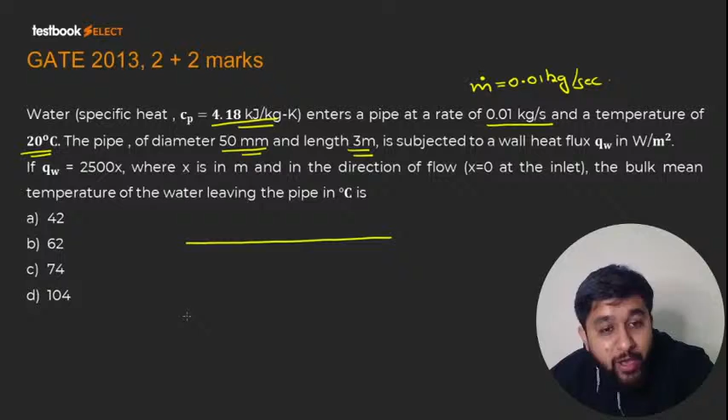और कहता है द पाइप ऑफ डायमीटर 50 mm एंड द लेंथ 3 मीटर इज सब्जेक्टेड टू वॉल हीट फ्लक्स QW इन वॉट पर मीटर स्क्वायर। सो वो कह रहा है कि आपके पास एक पाइप लेंथ है, ठीक है, सो मे बी गीजर के अंदर की पाइप है। तो गीजर में क्या होता है, गीजर में पाइप के अराउंड एक इलेक्ट्रिकल कॉइल होती है, तो इलेक्ट्रिकल कॉइल जो हीट जनरेट करती है वो पाइप के सरफेस को सप्लाई होती है, पाइप के आउटर सरफेस को सप्लाई होती है, और फिर पाइप के आउटर सरफेस से अंदर के फ्लूइड में जाती है ना। सो यू आर सप्लाइंग सम हीट फ्लक्स टू द पाइप, तो ये उसी हीट फ्लक्स की बात कर रहे हैं।

और अगर आपको ध्यान हो फ्लो थ्रू पाइप्स के केस में दो कंडीशंस होती हैं, एक होता है यूनिफॉर्म हीट फ्लक्स की और एक होता है यूनिफॉर्म टेम्परेचर की। जो अभी मेरे करंट स्टूडेंट्स हैं, सो गाइज मैंने आपको यूनिफॉर्म टेम्परेचर और यूनिफॉर्म कंडीशन के केस में नसल्स नंबर तो बताया था, पर मुझे बाद में ऐसा लगा कि यार अगर हम आधा पौना घंटा और डिस्कशन कर लेते हैं तो वो भी बेटर रहेगा। तो मैं एक शॉर्ट रिकॉर्डेड वीडियो बनाऊंगा, उसको यूट्यूब पे भी डाल दूंगा और आप लोगों के साथ भी शेयर कर दूंगा, सो आप लोग भी देख लीजिएगा।

अब वो बोलता है इस पाइप का डायामीटर कितना है, पाइप का डायामीटर है 50 mm, दैट इज 0.05 मीटर। तो मैं इसको पहले से ही 0.05 मीटर लिख लेता हूं, ताकि मेरे को बाद में कैलकुलेशन मिस्टेक ना हो। और फिर वो कहता है कि इस पाइप की जो लेंथ है वो 3 मीटर है, और हमें जो हीट फ्लक्स दिया हुआ है QW वो वॉट पर मीटर स्क्वायर में है।

अब जरा देखो वो क्या कहता है, इफ QW इज इक्वल टू 2500x, QW कितना है 2500x है। अब ये 2500x का मतलब क्या है, वो कह रहा है वेयर x इज इन मीटर एंड इन द डायरेक्शन ऑफ फ्लो, x इक्वल टू 0 एट द इनलेट, what is the bulk mean temperature of water leaving the pipe in degree Celsius। तो कौन बताएगा हाउ टू सॉल्व दिस क्वेश्चन।

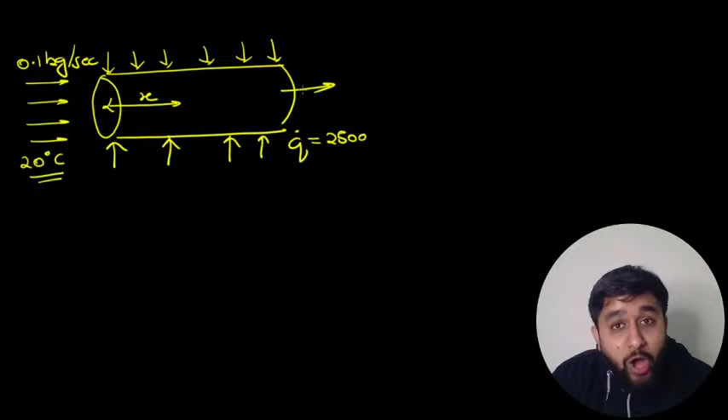What you have to find out? Exit temperature. Very good. I think Anish has already given us an answer and Dipankar is telling us the method to solve the question. Very good, very nice. So let me check whether Anish's answer is correct or not, and whether Dipankar's strategy will work here or not.

So what Dipankar is saying is: sir, what do you know? You know how much fluid is coming inside the pipe, so the pipe is a control volume, right? So how much fluid is coming inside the pipe and what is the temperature of that fluid? So basically you know how much enthalpy is coming inside the control volume, inside the pipe. And they are also telling us the heat flux.

So heat supplied to the pipe, heat supplied to the control volume. I think what Dipankar is telling us is that for steady state flow, the total energy coming inside is equal to the total enthalpy, total energy going outside. This is what he is telling us.

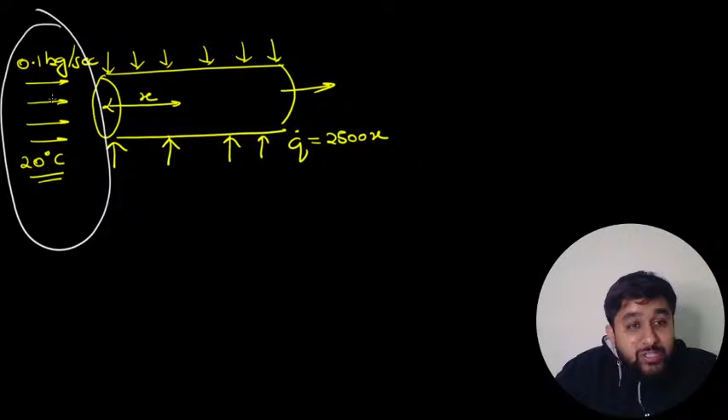So let us try one thing, let us apply this condition. So what you will say is: at inlet, the fluid will come inside with some enthalpy. So you will always write it as enthalpy rate, amount of enthalpy coming inside per unit time.

And to the pipe, we are supplying a heat transfer rate, which is given in this form, heat flux form. But simultaneously, the fluid is going outside also, so when the fluid goes outside, the enthalpy goes outside. So you will say the rate at which enthalpy goes outside. This is the steady state flow energy equation: the rate at which enthalpy goes outside minus the rate at which enthalpy comes inside is equal to the rate of heat supply to the pipe.

Now what is this, enthalpy going out, enthalpy coming inside? So I think for steady state flow, we can also write this as m dot Cp times (T naught minus Ti). So what will happen? This will be equal to Q dot.

Now what is this? This is the temperature of outgoing fluid, and this is the temperature of incoming fluid. So what you will say is: the temperature of outgoing fluid is equal to the temperature of incoming fluid plus Q dot by m dot Cp. Yes or no?

Please do let me know if this is correct or not. Tell me quickly if this is correct or not, if this method is correct or not.

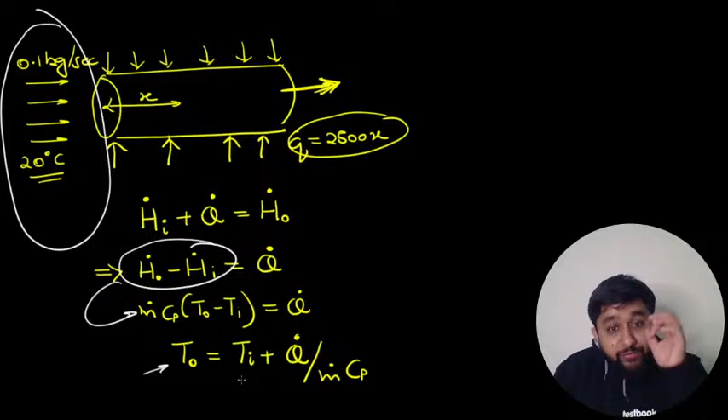Now the question is, we have to find out T naught, and for finding out T naught we should know Ti. Do we know Ti, the inlet temperature? Yes, we know it. Do we know the value of m dot? Yes, it is 0.01 kg per second. Do we know the specific heat at constant pressure? Yes, 4.18 kilojoule per kg Kelvin.

So in this, if somehow you are able to find out capital Q dot, you will be able to find out T naught also. So only one thing is missing, which we have to find out, that is capital Q dot. Once we know capital Q dot, we will also know the temperature of water at outlet.

Now let's do one thing, let us find out capital Q dot. So who will tell me how to find out capital Q dot? Anyone, please be fast. How to find out capital Q dot?

Integrate करके. Very good, very nice. Now guys check, what do you mean by heat flux? Multiply by surface area. Very good.

बहुत बढ़िया, ठीक है, good. Now guys check, what do you mean by heat flux? Heat flux means heat transfer rate per unit area, heat supplied to the pipe surface per unit area.

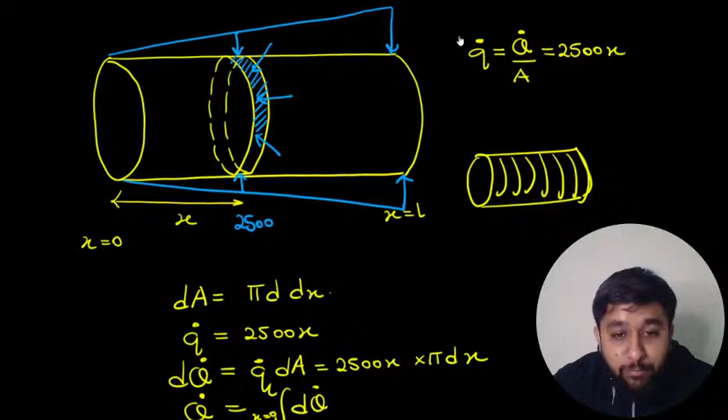Yesterday I came across a video - NPTEL has launched a new course, Fluid Mechanics for Astrophysics. आप लोग देखते होंगे Big Bang Theory, और उसमें एक गाय है called Rajesh Koothrappali, है ना? वो astrophysicist था। So fluid mechanics is used for study of सोलर सिस्टम, study of universe. बहुत इंटरेस्टिंग कोर्स है, अगर आप थर्ड ईयर में हैं तो sufficient time है, आप check कर सकते हैं। वेल सर, first hypersonic wind tunnel has been developed by DRDO in Hyderabad, first Indian, after USA and Russia. ये तो बहुत बढ़िया चीज है, nice है ना? और भी कुछ आ रहा था, hyperloop की testing भी हुई है, India में भी testing हुई है, वो एलन मस्क, अपना पड़ोसी बोल रहा हूं, उसकी भी testing हुई है।

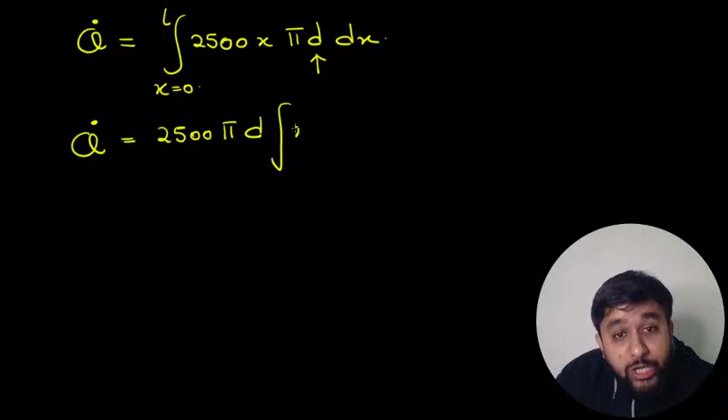Thank you Anish, thank you for your kind words. So let us integrate it. 2500x pi d dx from x equal to 0 to L. Now 2500 is a constant, pi is a constant, diameter of the pipe is a constant, it will also come inside. Integral of x dx, where x varies from 0 to L.

In our case the diameter of the pipe is 0.05 meters, and the length of the pipe is 3 meters. Integral of x dx, that will be x square by 2. So you will have q dot equal to 2500 pi into 0.05, and this decimal and these zeros will cancel out, into x square by 2, where x varies from 0 to 3.

So this becomes 25 into 5, that is 125. 125 pi into 3 square, that is 9. 9 by 2 minus 0 by 2.

I think this is what you are getting. Please check if my answer is correct or not, or if I have made any mistake.

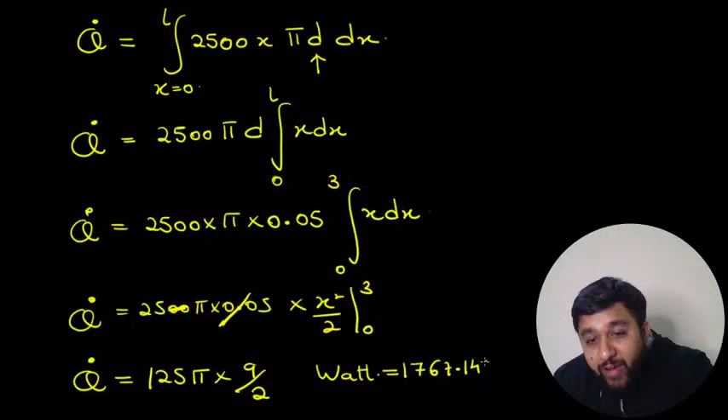1767.146 watts. So Anish, Reddy, please check, me and Dipankar both are getting the same answer.

Right now France is developing a new nuclear power plant with the help of Indian scientists. This is a very big achievement for us. People from BARC are helping out.

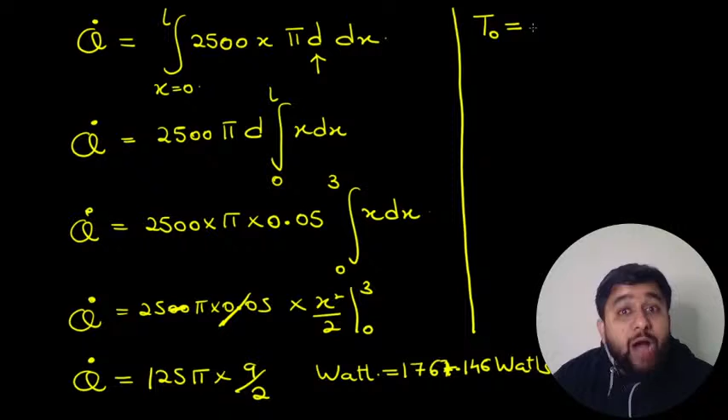Now guys, check where we want to use this heat transfer rate. We want to use this heat transfer rate to predict the outlet temperature of water. So inlet temperature of water plus Q dot upon M dot Cp.

So what will happen: inlet temperature of water is 20 degrees Celsius. Heat transfer rate is 1767.146 divided by mass flow rate, which is 0.01, and Cp is 4180.

So when you solve this: 1767.146 divided by 0.01 and divided by 4180, plus 20. So the answer will be 62.276 degrees Celsius.

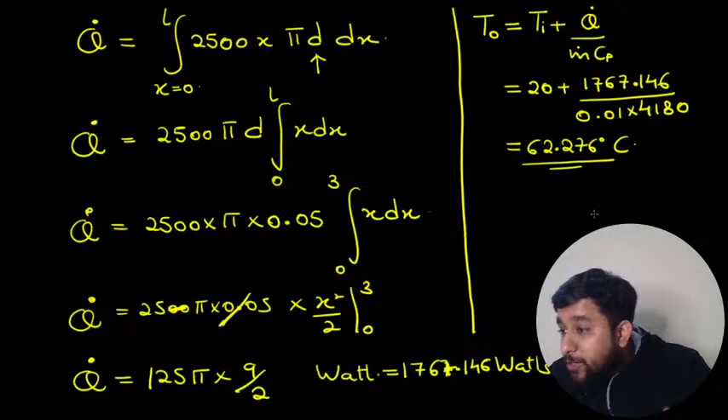0.01, beta. 0.01, I made a mistake here, I wrote it wrong here. It was 0.01 kg per second. Mass flow rate was 0.01 kg per second.

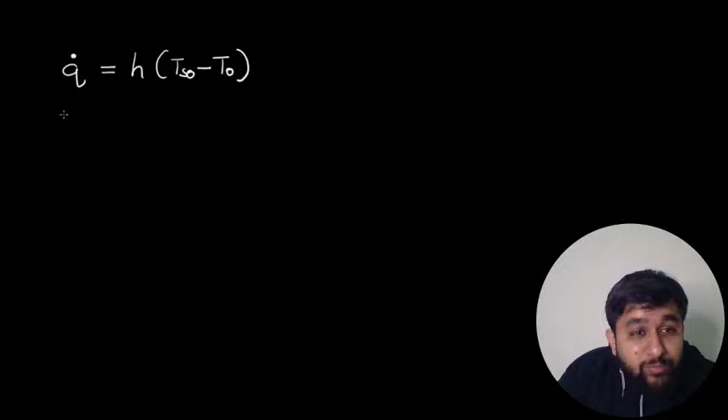Now we are talking of the outlet point, so surface temperature of pipe at outlet and fluid temperature of pipe at outlet. From this equation you can write: surface temperature of pipe at outlet equals fluid temperature at outlet plus Q dot by h. I hope I am doing this correctly.

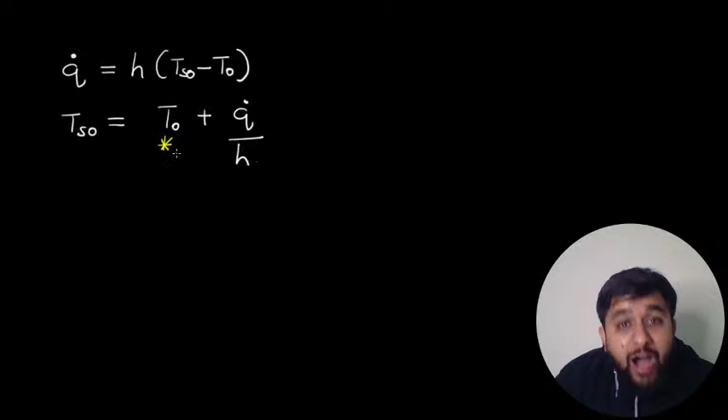This means, in this equation, if I get the value of outlet temperature of fluid, the value of heat flux, and the value of coefficient of convection, I will be able to find out the surface temperature of the pipe also. Am I correct or not? Please do let me know.

And actually Q dot is given to us. Everywhere the heat flux is constant, same - that heat flux is 5000 watt per meter square. What is the coefficient of convection? 1000 watt per meter square Kelvin.

So to find out the surface temperature at outlet, we only need the fluid temperature at outlet, and we will add a term to it and get our answer. I hope I am saying this correctly. Deepankar is saying yes, I hope the rest of you also confirm this.

So Anish, what do you think? Am I correct, or have I made any mistake? Okay, very good, very good.

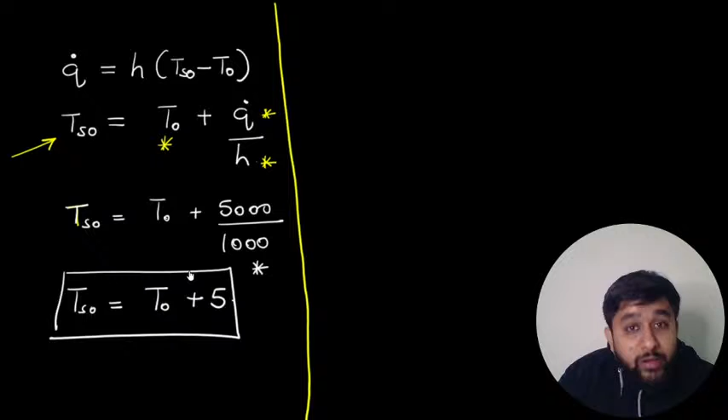So first, let us try some method to find out the outlet temperature of fluid. Now let's have a look at the data given to us. The data says the fluid comes inside with a mass flow rate of 0.01 kg per second, and enters with a temperature of 20 degrees Celsius.

So for water, the specific heat at constant pressure is 4.18 kilojoule per kg Kelvin. I think this is indicative of how much enthalpy comes inside per unit time, and it also gives us the heat supply rate to the pipe.

The heat supply rate is constant, 5000 watt per meter square everywhere. If we multiply this heat flux by the area of the pipe, we will get the total heat transfer rate. Now enthalpy is coming inside, heat is coming inside, and from here the enthalpy is going outside.

The rate at which enthalpy comes inside plus the rate of heat supply is equal to the rate of enthalpy going outside, by the steady state flow energy equation. So H dot O minus H dot I is equal to Q dot. So Q dot is equal to M dot Cp times T naught minus Ti, or T naught is equal to Ti plus Q dot by M dot Cp.

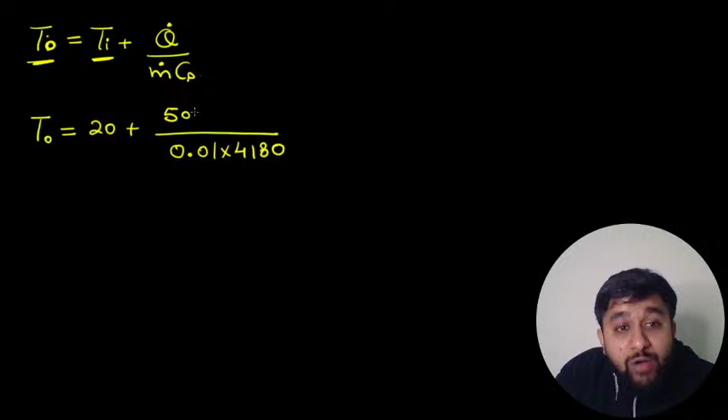How do we find the total heat transfer rate? The heat flux is uniform, 5000 watt per meter square. What will be the surface area of the pipe to which we are supplying this heat flux? I think it's pi d L, so pi into d, which is 0.05, into L, which is 3 meters. Let me confirm these values - yes, 0.05 meters is the diameter and 3 meters is the length.

So let us solve this. Please get an answer. Very good, I think this decimal and this decimal will cancel out, and this 0 and 0 will also cancel out. So you will have 500 into 50, that is 25,000 into pi into 3 divided by 418.

Did something go wrong? 5000 pi d L, 5000 pi d L into 4180... So I am getting 20 plus 56.368, that is 76.368. So this is the outlet temperature of the fluid.

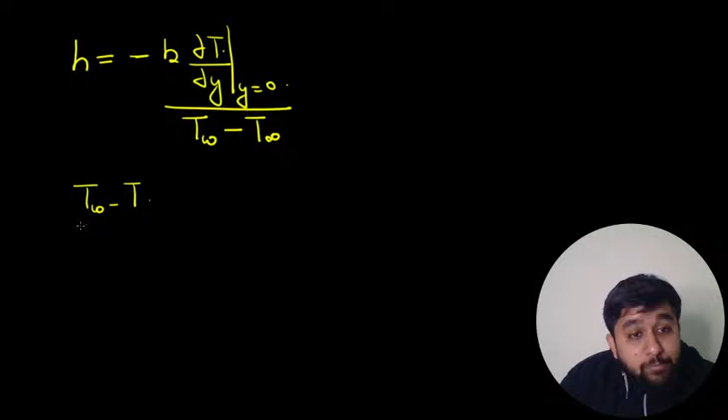Now it is given to us that wall temperature minus temperature at a point, upon wall temperature minus fluid temperature, is equal to how much? That is equal to A plus By by L, plus Cy by L whole square. Now let us take a derivative of this.

I will do del T by del Y. When I do del T by del Y, the denominator is a constant, because whatever may be the Y value - Y means the distance of a point from the surface - whatever may be the Y value, wall temperature means surface temperature, which is a constant, and T infinite means fluid temperature. So the numerator: the derivative of TW will become 0.

And here you will have minus del T by del Y. I hope I am doing it correctly. Minus del T by del Y. Now, if you have taken the derivative on the left hand side, then you will also take the derivative on the right hand side. So A is a constant, its derivative will be 0.

Y, power of Y is 1, so derivative will become 1, so this will be B by L. Power of Y is 2, y square, so derivative will become 2cy, but in the denominator there is an L square also. Now guys, please note, to find out the value of h, I need to substitute y equal to 0 in this derivative.

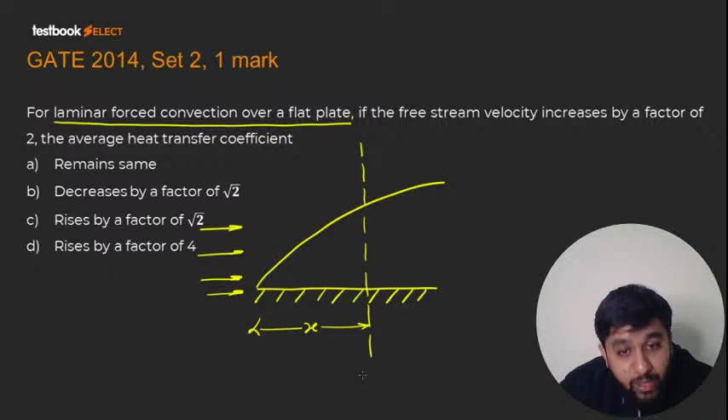For laminar boundary layer, if I take a cross section at a distance x, the local Nusselt's number at this cross section is given as 0.332 into the local Reynolds number raised to power 1 by 2 into Prandtl number raised to power 1 by 3.

At this point, the Nusselt's number that comes out is given like this. This is the local Nusselt number. And correspondingly, you can also write the local coefficient of convection.

So for the same point, the local coefficient of convection will be 0.332 into K by X into local Reynolds number raised to power 1 by 2, Prandtl number raised to power 1 by 3.

Now, what is the difference? Nusselt's number multiplied by K divided by characteristic length gives the local coefficient of convection. Why am I calling these local Nusselt number and local coefficient of convection? Because these are quantities for this particular point. But I want to write down the average quantity.

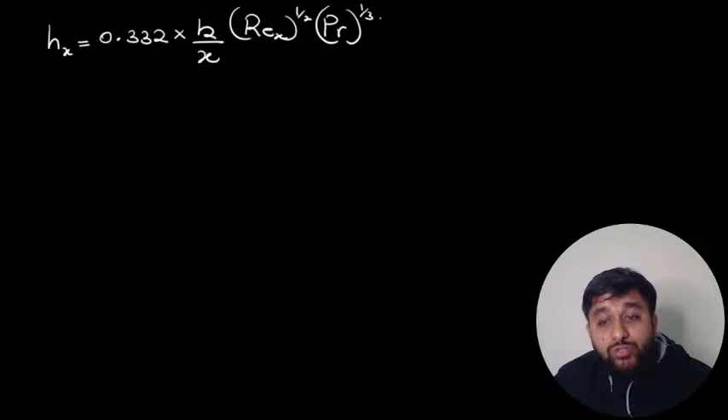Whenever I want to calculate heat transfer rate for the entire plate, I want the average quantity. What is the average quantity? The average H bar. That average quantity is 0.664 into K by L into Reynolds number at the trailing edge under root into Prandtl number cube root. I think this is the correct formula, right?

And similarly, if you write down the average Nusselt number for the complete plate, it will be 0.664 Reynolds number L under root, Prandtl number raised to power 1 by 3.

Now, apart from this, you should know the Nusselt's number for flow through pipes. Constant temperature condition, that is 3.66. Uniform heat flux condition, that is 4.36. All these values and even this formula are written for laminar boundary layer.

Then you should remember, not the entire formula, only this: for most cases of natural convection, the Nusselt's number is written as a constant into Rayleigh's number raised to power 1 by n. Rayleigh's number is Grashof number into Prandtl number. If you have laminar flow, n value is equal to 4, and if you have turbulent flow, n value is equal to 3. These things, if you can remember, that would be good.

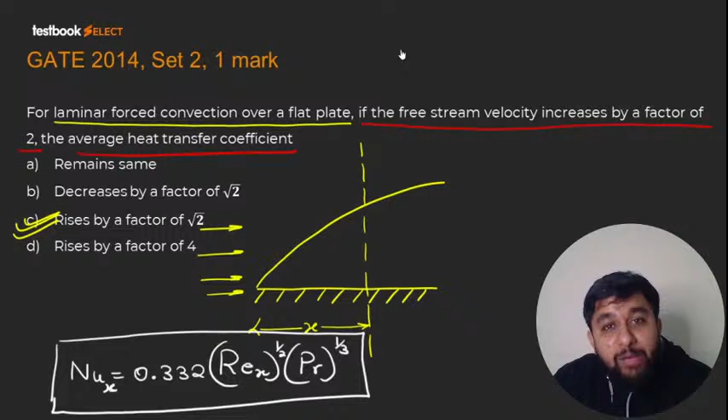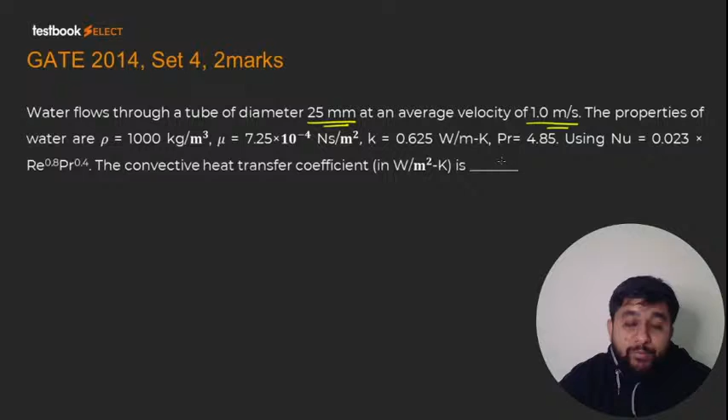Now guys check this: Water flows through a tube of diameter 25 mm at an average velocity of 1 meter per second. So there is a tube, and through the tube water flows with a mean flow velocity of 1 meter per second, and the diameter of the tube is 0.025 meter.

Now they are saying the properties of water are 1000 kg per meter cube density, dynamic viscosity is this much, thermal conductivity is this much, and Prandtl number is also given, so no need to find out Prandtl number. And they are saying Nusselt's number is this.

Whenever these powers come, this power comes from turbulent flow. This is the power for turbulent flow. If the Reynolds number power is 0.8 and Prandtl number power is 0.4, generally this is turbulent flow. So turbulent flow is going on over here. And I think you can also check using the Reynolds number value itself to confirm it.

But they are asking for the convective heat transfer coefficient. I hope you remember there are 2 methodologies to find out convective heat transfer coefficient. Either you know the temperature profile, then you can use the definition: the heat convection between the surface and fluid, H(Ts - T infinity), is nothing but the heat conduction through the layer of fluid adjacent to the solid surface. So you can use this definition, but we also know finding the temperature profile is very difficult. So generally we do experiments and find out the dimensionless number, that is Nusselt's number. Once you know the Nusselt's number, you can predict the value of H. So this is your formula for H.

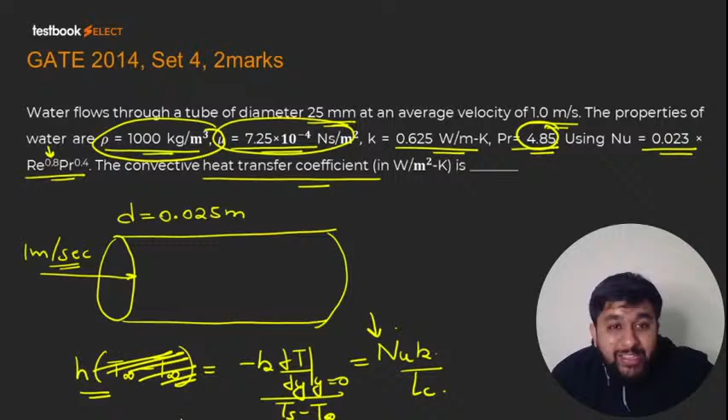So let me get the Reynolds number. Reynolds number is written as rho*u*d by mu when we are talking of flow through pipes or tubes. Let us take the values: density 1000 kg per meter cube, dynamic viscosity 7.25 into 10 raised to power minus 4, which will come in the denominator. And the flow velocity is 1 meter per second and diameter is 25 mm, that is 0.025 meters.

So let us check 1000 into 0.025 divided by 7.25, and 10 raised to power 4 will go up. So this will become 3.4485 into 10 raised to power 4. So this is your Reynolds number.

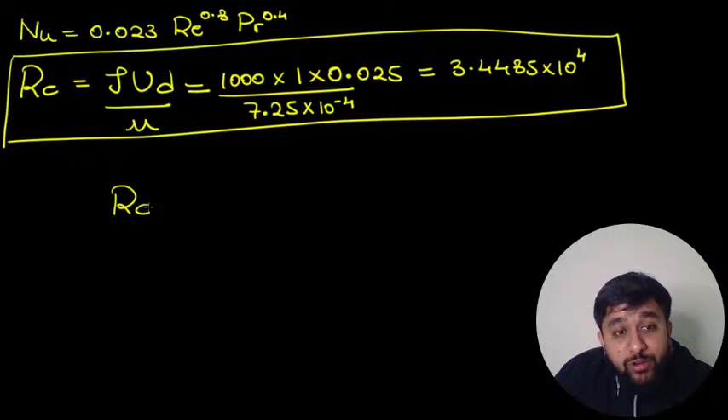Now guys, please note, if the flow is turbulent, then we use this formula. Is the flow turbulent? If Reynolds number is greater than 5.5 lakh, the flow is turbulent. I tell many times, when Reynolds number is less than 2 lakh, the flow is laminar, and when Reynolds number is more than 5.5 lakh, the flow is turbulent.

Here it looks like laminar flow. I think this is laminar flow. Is that so? No, sir.

These are the values for flow over flat plates, not for internal flows, not for flow through pipes. For flow through pipes, the critical Reynolds number is 2300 and 4000. You need to keep this in mind - these values are for flow over flat plates, and these other values are for flow through pipes. Now definitely this value is like 34,000, much greater than 4,000, so this is a turbulent flow. So that formula is given for turbulent flow.

So you know guys, have a look at Dipankar's answer. Dipankar is saying, sir, laminar flow can also be achieved in this case.

Actually, the experiments done by Reynolds were based on a certain degree of roughness and certain vibration in the system. If you eliminate all the vibration in the system, and if you make the surface very smooth, then you can achieve laminar flow at very high Reynolds numbers in this case also. So till now, people have been able to achieve laminar flow up to a Reynolds number of 1 lakh - this is an experimentally achieved value. Earlier the record was 50,000, now it has become 1 lakh.

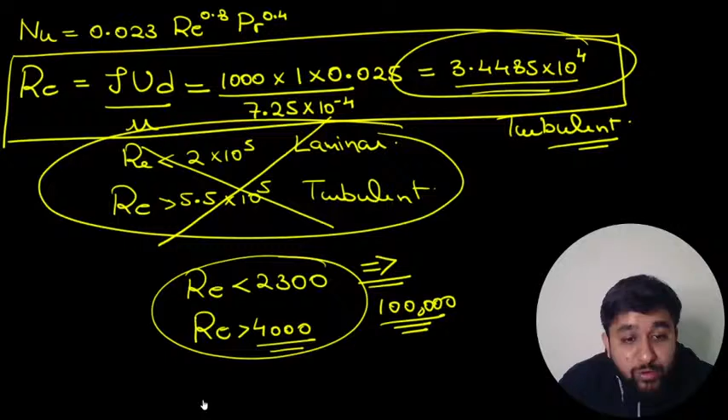Let's move ahead. Now we were trying to find out Nusselt's number. When you talk of Nusselt's number, let me take one more slide. Nusselt's number is 0.023 into Reynolds number raised to power.

So how much is the Reynolds number? Reynolds number is 34,485, raised to power 0.8. And how much is the Prandtl number? Prandtl number is 4.85, correctly given for water, raised to power 0.4.

So once you solve this, you will get your answer. And I think Anish is getting the correct answer - absolutely correct answer is coming. Let me also solve it once and check.

34485, so exponential - this thing will become 4266.81 into 0.023 into 0.4 natural log of 4.85, 0.4 natural log of 4.85 and exponential. So this is 1.88. So 1.88 into 4266.81 into 0.023. So here I am getting a Nusselt's number of 184.55.

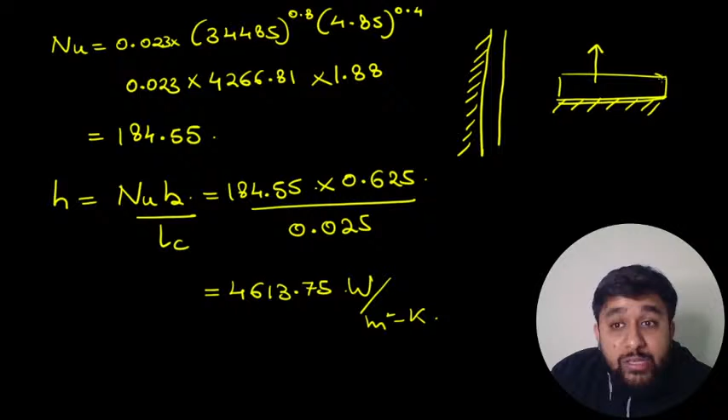अब इस पे विस्कस फोर्स लगाने वाला कौन है? कोई भी नहीं है विस्कस फोर्स लगाने वाला. मगर ये वो पॉइंट है जहां से फ्लूइड ने मूव करना स्टार्ट किया था. तो इसकी इनिशियल वेलोसिटी कितनी है? इसकी इनिशियल वेलोसिटी 0 है. तो ये डिफरेंस आता है.

सो यहां भी फ्लो वेलोसिटी 0 है नो स्लिप कंडीशन के कारण, बिकॉज ऑफ विस्कस फोर्स, और यहां पे फ्लो वेलोसिटी 0 है बिकॉज दिस इज द पॉइंट फ्रॉम वेयर द फ्लूइड विल स्टार्ट मूविंग. आई होप आई एम करेक्ट. सही बोल रहा हूं मैं शायद, ठीक है ना?

Is that correct? Please do let me know. I hope आपका यही doubt है. बाकी in real life you cannot have a fluid without vertical surfaces also. ये भी चीज है, तो यहाँ पे इनका भी boundary layer formation होगा, मगर अगर ignore कर दो तो ये चीज आती है. चलो फिर.

So I think Anish's answer, my answer, Dipankar's answer, we are all giving the same answer. So let's move ahead to the next question. What is the answer of this question? इस question का answer बताओ फटाफट. Please do let me know what is the answer of this question.

Option D. So Dipankar, Anish are saying option D. क्या कहना है Reddy? If Reddy is watching the video, it will not form at all.

So guys, first of all, please have a look. For flow of viscous fluid over a flat plate, if the fluid temperature is same as the plate temperature, the thermal boundary layer is thinner than velocity boundary layer, thicker than velocity boundary layer, or of the same thickness as velocity boundary layer. I think ये thinner कब होती है?

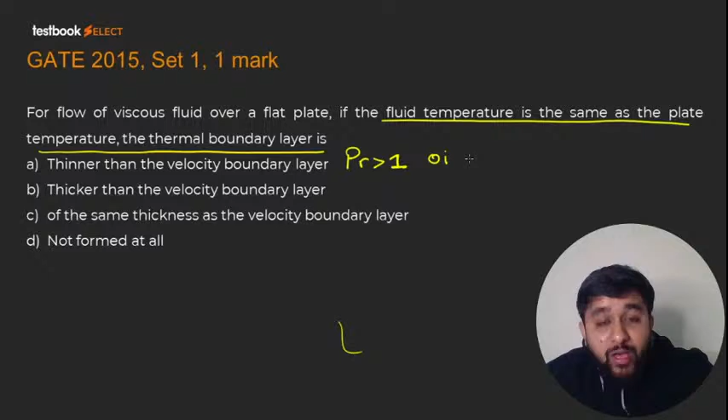जब Prandtl number greater than 1 होता है. I think when Prandtl number is greater than 1, thermal boundary layer is thinner than velocity boundary layer, which happens in case of oils. When Prandtl number is much less than 1, that is liquid metals, thermal boundary layer is greater than velocity boundary layer. And when Prandtl number is equal to 1, which happens for a lot of gases, this is the situation.

But bhaiya, thermal boundary layer means temperature as a function of Y, which happens because of heat exchange. Here the temperature values are same, so there will be no heat exchange, there will be no temperature profile. So here thermal boundary will not be formed. Very good, very nice, बिल्कुल सही है, ठीक है ना?

But sir, but is 0 less than any positive number? Is 0 less than any positive number? दीपांकर बेटा दोबारा बोलना समझ नहीं आया. मतलब शायद आप बोल रहे हो कि Prandtl नंबर नेगेटिव हो.

Is 0 less than any positive number 2? Okay, now let's move to the next question.

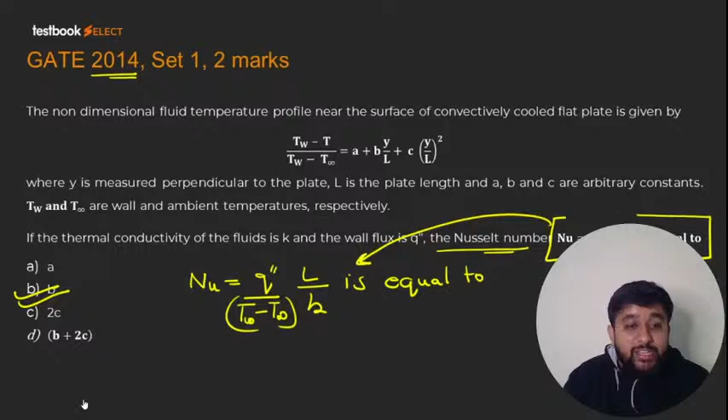This term came up in another question too. When we were solving these questions, we were using a term called mean temperature of the fluid, bulk mean temperature of the fluid.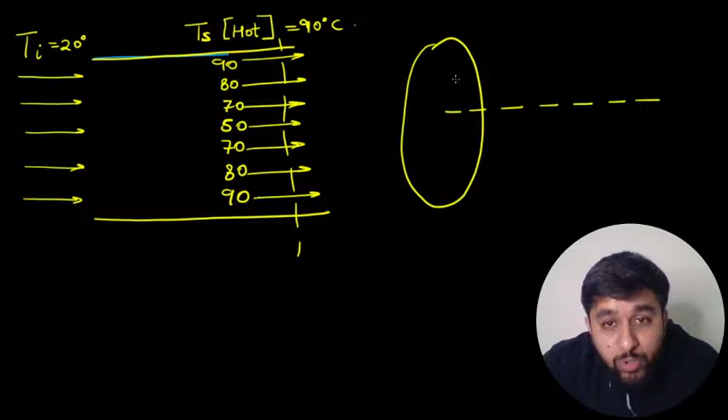So let us suppose this is the cross section of the pipe, and being axis symmetric flow - axis symmetry means there is a symmetry about the center line - I can define every term as a function of radius: velocity as a function of radius, temperature as a function of radius. Say for example, this is a circular strip, and the circular strip has an area of 2 pi r dr. How much is the area of this circular strip? 2 pi r dr.

And the velocity with which the water crosses the strip is small u. I hope you remember small u will also be a function of r. It will be minimum at the periphery due to no slip condition, and maximum at the center line. Now what will you say?

You will say that the mass crossing the strip - how will you write the mass crossing the strip? Velocity into area becomes the discharge, and discharge into density is the mass. So this is the mass crossing the strip per unit time. And if we multiply mass by specific heat and the temperature, we will get enthalpy crossing the strip per unit time. Obviously temperature is also a function of radius.

Now this is the enthalpy crossing one strip. So when you add the enthalpy crossing all the strips, you will get the total enthalpy crossing a section. First tell me, is this clear or not? First tell me.

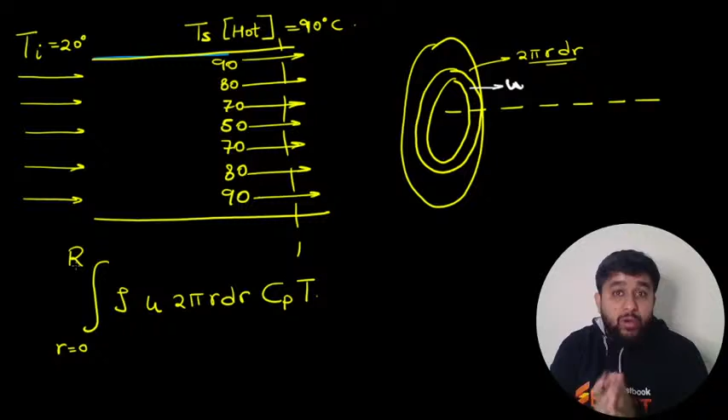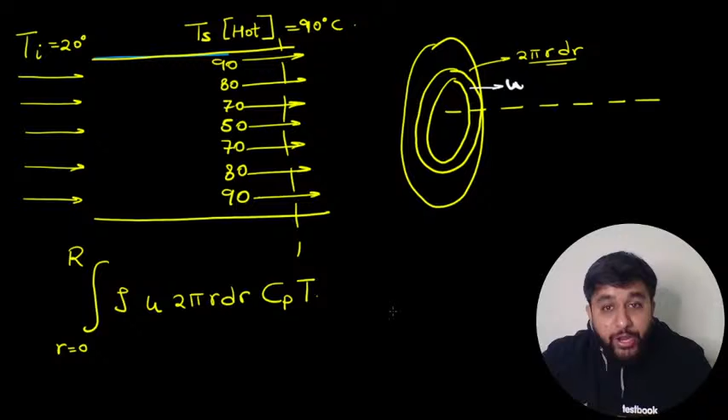Fluid crossing a section means thermal energy or enthalpy crossing a section, but this fluid has a non-uniform temperature. So we use the symmetry about the center line - everything can be written in terms of r, the distance from the center line. On all points at the same r, velocity is the same and temperature is the same, so this temperature is 80 degrees Celsius.

For this particular strip, we wrote down the mass flow rate. That mass has some temperature, and I wrote down the enthalpy - this is the enthalpy that crosses the section per unit time.

Guys, please tell me, is it clear or not clear? Is there a doubt over here or is it clear? Please do let me know.

Now when you have a non-uniform temperature, a non-uniform wall shear stress, you define an average shear stress. When you have a non-uniform coefficient of convection, you define an average coefficient of convection. Similarly, when you have non-uniform temperature, you define an average temperature.

That average temperature represents the enthalpy crossing the section. So enthalpy crossing the section is equal to mass flow rate through the section into specific heat of the fluid into mean temperature of the fluid. This mean temperature is called the bulk mean temperature - a single average value of temperature that represents the enthalpy crossing a section.

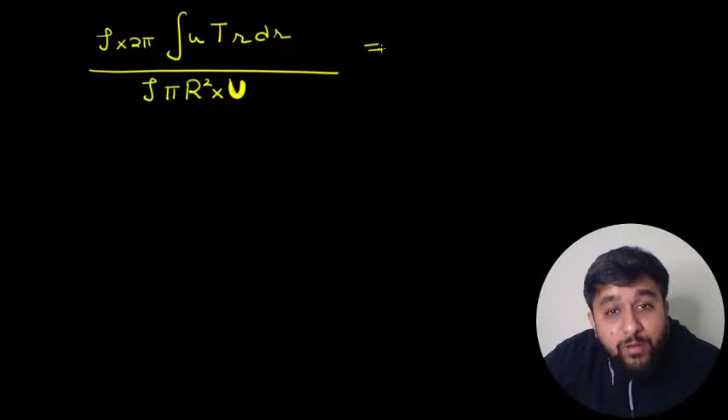Now rho and rho will cancel out, pi and pi will cancel out, and you will have mean temperature is equal to 2 times integral of U T R dR by capital R square U. I think this is what you are getting. Please do let me know if this is correct or not.

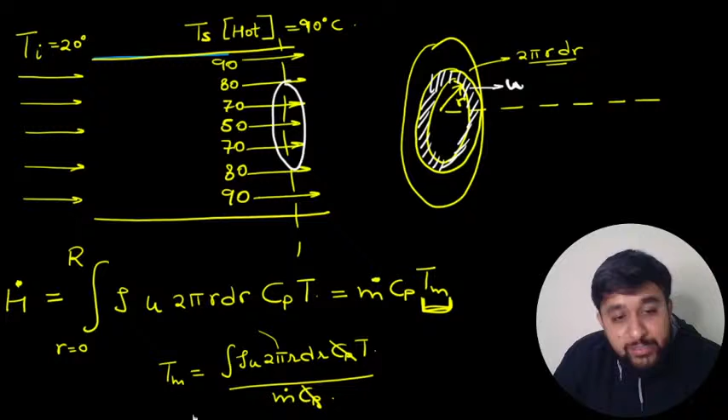Okay, now let's read the question first. It says for flow through a pipe of radius r, the velocity and the temperature distribution are as follows. So it has given you velocity as a function of r and x.

So x means along the pipe length, and a particular cross section, while r means distance from the center line. At this point, the velocity is constant, meaning everywhere the velocity is the same. But temperature is not constant - temperature is a function of r.

They are saying the bulk mean temperature is given like this. I think it's the same formula we derived: 2 by mean flow velocity, capital R square, integral of u t r dr. So they are asking, with the mean flow velocity um, what is the value of mean temperature?

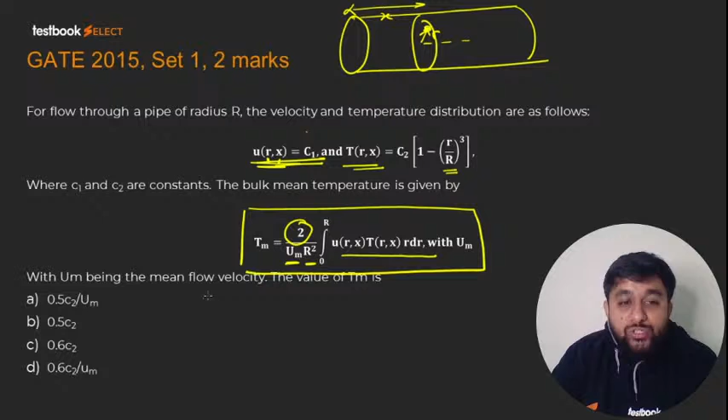Now, first of all, can anyone tell me what is the mean flow velocity in this question? What is the value of um in this question? Can anyone tell me the value of um here? Anyone, please be fast. Anish, Dipankar, what will be the value of mean flow velocity?

In this question, the mean flow velocity will of course be C1. Why? Because everywhere the velocity is constant. So when everywhere the velocity is constant, it is uniform, it is itself the mean flow velocity. So um is nothing but C1. And in fact, this will also come outside only because this is a constant.

So what will you say? You will say Tm is equal to 2u by um capital R square, and this will cancel out only, so you will have integral of T R dr. So what will be our answer? Our answer will be Tm is equal to 2 by capital R square integral of T R dr.

And what is the formula of capital T? Formula of capital T is C2, 1 minus R square by capital R square, R dr. Let me check the formula if this is correct or not. R cube - sorry, there is a cube in the question. Yes, there is a cube.

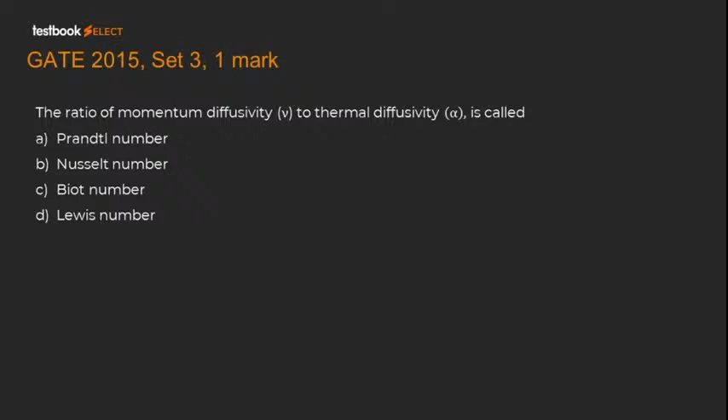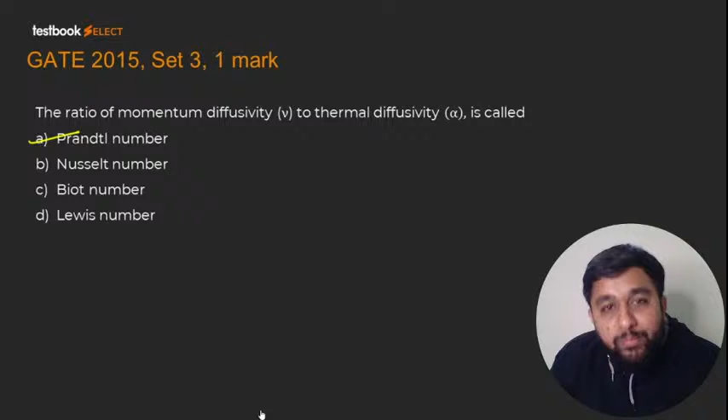Okay, I think this question is very simple, it's a direct question. The ratio of momentum diffusivity to thermal diffusivity - everyone knows it's Prandtl number. Nusselt number you know, Biot number you know, check what Lewis number is. Once Lewis number was asked in a mismatched way, once Weber number was asked mismatched, and once Schmidt number was also asked, but this was quite long back. So Lewis number is not part of your syllabus, but still for knowledge you can check it.

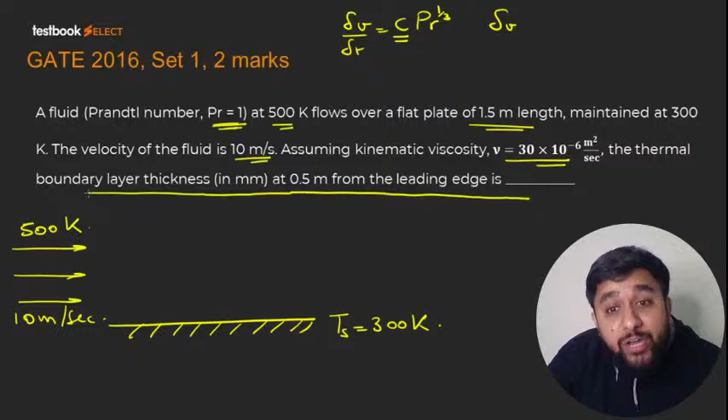They are saying that when the fluid flows over a flat plate, we know there will be formation of a velocity boundary layer and a thermal boundary layer. But since Prandtl number is equal to 1 and we majorly treat the constant to be 1, delta V and delta T will be the same, so the velocity boundary layer and thermal boundary layer will coincide.

Now they are asking, at a distance x of 0.5 meters, what will be the thickness of the velocity boundary layer? For flow over a flat plate, if the boundary layer is laminar at a section, we can use the Blasius solution, which says the thickness of the velocity boundary layer is 5x by root of Rex, provided the flow at that section is laminar. Here since Prandtl number is equal to 1, delta T is equal to delta.

First, let us find the Reynolds number at section x. We write rho u naught x by mu. The kinematic viscosity is given as 30 into 10 raised to power minus 6, since u naught by x, mu by rho is the kinematic viscosity. Velocity is 10 meters per second and x is 0.5 meters. The decimals will cancel out, giving us 1 by 6, and we will have 1 by 6 into 10 raised to power 6, which becomes 1.667 into 10 raised to power 5. So this is the Reynolds number.

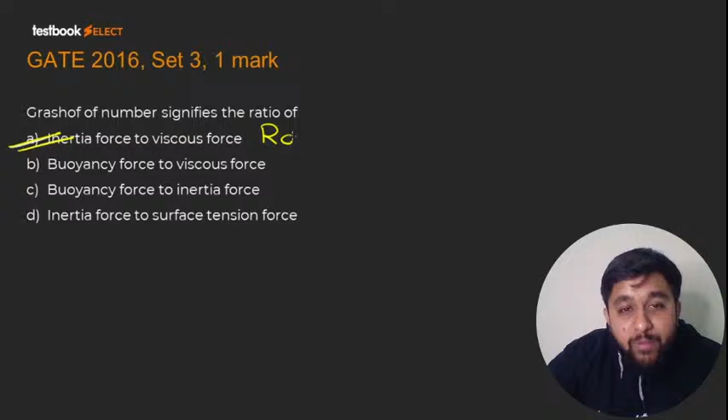There are 4 options given to us, ratio of forces. What they are saying is inertia force to viscous force - that is direct, that is your Reynolds number. Buoyant force to viscous force - this we have seen in natural convection, Grashof number. Buoyant force to inertia force, and inertia force to surface tension force - check which numbers these are. I have told you Euler's number, Weber's number, Mach number, Cauchy number. Check, remember, you should know all the numbers. But in heat transfer we use the first 2 numbers, and our answer is option B.

ठीक है, चलो फिर नेक्स्ट क्वेश्चन पे बढ़ते हैं, फटाफट कवर अप करते हैं। I think questions 1, 2, 3 and 4 are there in my PPT, और इसके अलावा एक क्वेश्चन और है, तो वो भी चेक करेंगे। क्वेश्चन है, इसका नाम क्या है?

Related to capillary effect है। So whenever there is flow through very thin tubes where the capillary effects come into picture, surface tension forces come into picture, then you use this number, मगर इसका एक स्पेशल नाम भी है। तो आपको जो इंपॉर्टेंट नंबर्स पता होने चाहिए इन डेफिनेशन: Froude number, Weber number, Euler's number, Cauchy number, Mach number. So these are the numbers in fluid mechanics which can be asked directly, and obviously Reynolds number. And in heat transfer, the numbers to be remembered: Grashof number, Prandtl number, Reynolds number, Nusselt's number, Biot's number, Rayleigh's number and Fourier's number.

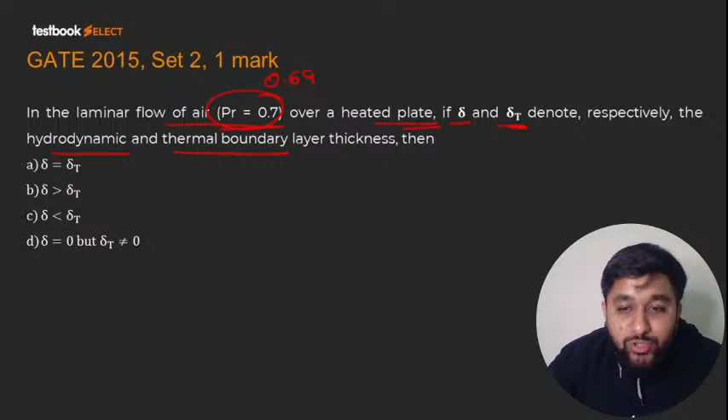So delta represents hydrodynamic boundary layer, delta T represents thermal boundary layer. We know that when Prandtl number is equal to 1, delta is equal to delta T. When Prandtl number is greater than 1, momentum diffusivity is more effective, so more fluid will be slowed down and delta will be thicker. When Prandtl number is less than 1, thermal diffusivity is more effective, so more fluid will gain heat and delta T will be thicker.

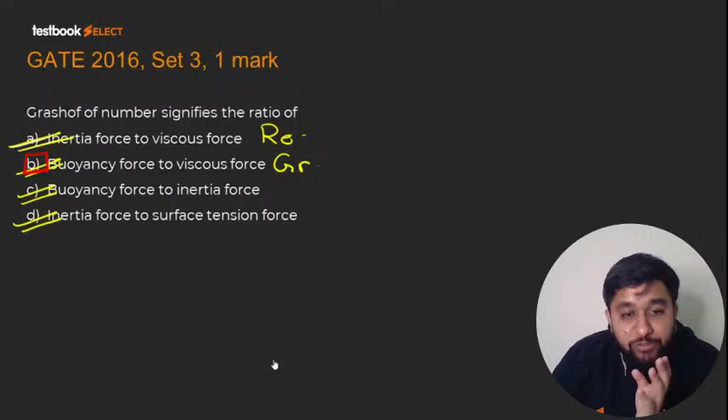In the last more than 20 years, we have not got a question on natural convection except for 2016, where the Grashof number definitely came, but you did not get any kind of numerical. So this was the first time in a long number of years that you got a question on natural convection.

So it says a thin vertical plate of height capital L. Let me draw a thin vertical plate of height capital L, and infinite width perpendicular to the plane of the figure.

By infinite width they mean that terms will not be a function of the z direction. If you consider this as x direction, this as y direction, then perpendicular to the plane of the paper will be the z direction. So properties are not a function of z direction. This is the meaning of infinite width.

Now it says this plate, there was also a figure showing the same thing, and it says the plate is losing heat to the surroundings by natural convection.

So I think what will happen is, if the plate is losing heat, the nearby fluid will gain heat. Once the nearby fluid gains heat, it will try to move up. A few days ago, in the morning session, in natural convection, I even derived an equation for the momentum conservation principle, where we saw how to write down the buoyant force using the density difference, and how the Grashof number comes into picture. So the fluid will gain heat from the surface, its temperature will rise, its density will decrease, and this fluid will rise up. Very good, Dipankar, absolutely correct answer.

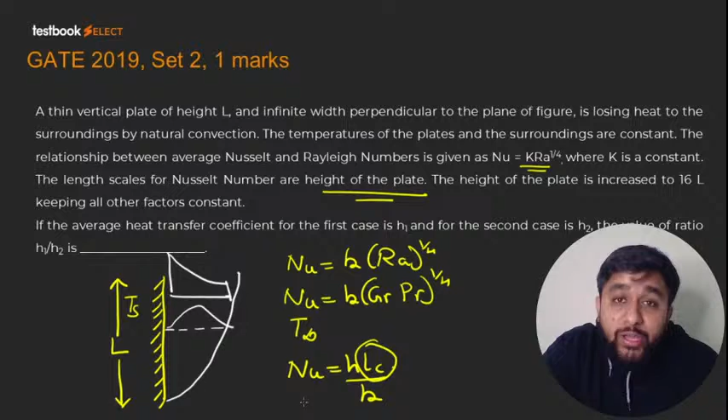So this is the length scale, that is the characteristic length. For characteristic length, we are going to use height of the plate. And in the video of natural convection I told you that for vertical plates or vertical cylinders, the natural convection characteristic length is the height of the plate or cylinder. If you are talking of horizontal cylinder or sphere, diameter will be the characteristic length. If you are talking of horizontal plate, then surface area by perimeter will be the characteristic length. This is how characteristic length is determined.

Now for Nusselt's number, this is the characteristic length. Now they are saying if you keep all the parameters constant, which is written over here, and the height of the plate is increased to 16L, keeping all other factors constant. So in natural convection, what are the factors? Surface temperature, fluid temperature, acceleration due to gravity, density of the fluid, dynamic viscosity, specific heat, and conductivity of the fluid. So they are saying all other factors are constant except for height of the plate. So what will happen to coefficient of convection?

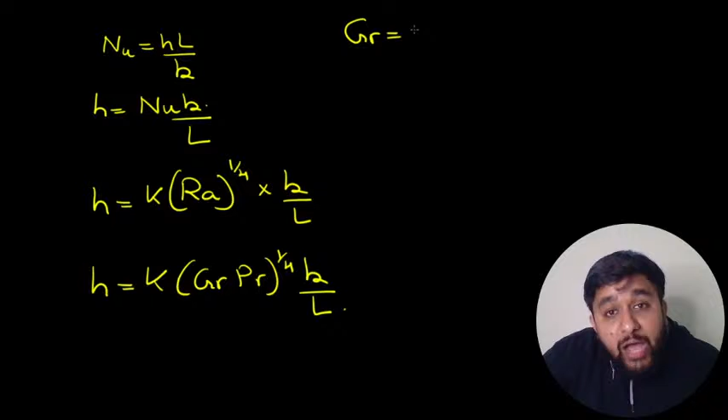I think it's very easy, the question is direct. We know Nusselt's number is equal to HL by K, or H is equal to Nusselt's number K by L, and Nusselt's number is equal to some constant, Rayleigh's number to the power 1 by 4, into K by L. Now what is Rayleigh's number? It is the product of Grashof number and Prandtl number. The formula of Grashof number is rho square L cube G beta (TS minus T infinity) divided by mu square. What is Prandtl number? Mu C by K.

So Grashof number has cube of the length of the plate, height of the plate. So you will have GR with length cube, so L cube raised to power 1 by 4, and in the denominator there is L also, but all other terms are constant. So you can directly say coefficient of convection is proportional to L raised to power 3 by 4 upon L. So coefficient of convection is proportional to L raised to power minus 1 by 4.

So they are saying if the length becomes 16 times, then what will happen? I think you will simply say H1 by H2 is equal to L2 by L1 raised to power 1 by 4 - actually it was minus 1 by 4, so L1 I have written in the denominator. Now they were asking us H1 by H2, not H2 by H1 - initial coefficient of convection by final coefficient of convection. Now L2 is 16 times, so 16 raised to 1 by 4 is 2 times. So actually coefficient of convection decreases in this case.

And you can also say, sir, how can coefficient of convection decrease? When there is more surface area, heat transfer rate will be more. I will say yes, heat transfer rate can be more, but we are not talking of heat transfer rate, we are talking of coefficient of convection. And since the length of the plate will be more, the boundary layer formation will be more, and the viscous forces will be more effective. Viscous forces will slow down the flow, so coefficient of convection will decrease. Okay? This way. So I think it was a simple question.

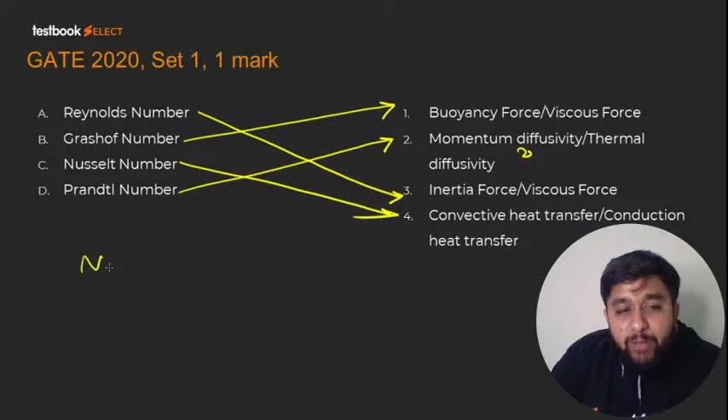One definition is the temperature gradient in the layer adjacent to the solid divided by the reference temperature gradient. But it has one more definition, and that definition is enhancement in heat transfer due to convection over conduction.

Another definition: if the layer of fluid is stagnant, if the fluid mass is stagnant, then suppose there are two plates separated by a large distance. One is hot, the other is cold, and the fluid between them is stagnant.

So between the two plates, heat transfer will occur by conduction. But if the fluid is not stagnant, heat transfer will occur by convection. Then how much the heat transfer rate increases by convection as compared to conduction, that is also called Nusselt's number. So that is what Nusselt's number is.

And this can never be less than 1. This will always be greater than 1. Totally correct, totally correct, absolutely right.

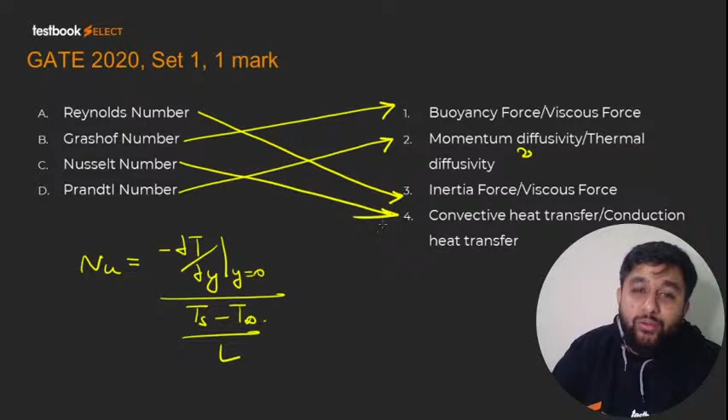Good, so let's move on to the last question. So what is the last question? Now, I think some portion of the question is hidden behind me. So what I will do is read out the question first, and I will keep marking and drawing the diagram.

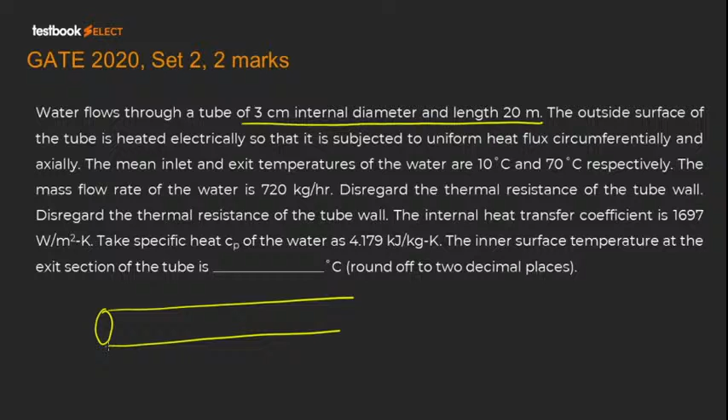Water flows through a tube of 3 centimeter internal diameter - let me move out of the way, that would be good. Now you can see, good idea. Water flows through a tube of 3 centimeter internal diameter and length of 20 meters. So there is a tube whose diameter is 3 centimeter and length is 20 meters.

Now it says the outside surface of the tube is heated electrically, so maybe we are talking of a geyser, such that it is subjected to uniform heat flux circumferentially and axially. So the external surface of the pipe is subjected to uniform heat flux axially - on all these points, heat flux is same. It is subjected to uniform heat flux circumferentially - on all these points, heat flux is same. So basically, the entire surface of the pipe is subjected to the same heat flux.

Now it says the mean inlet and exit temperature, so basically the bulk mean temperature of water. The bulk mean temperature of water at inlet is 10 degrees Celsius, at outlet it is 70 degrees Celsius respectively. The mass flow rate of water is 720 kg per hour. Disregard the thermal resistance of the tube wall.

So basically it says if we see the tube from the inlet side, we will see this. And from outside we are supplying some heat. Now this heat will first get conducted through the tube wall and then convected to the fluid. So there will be a temperature drop across the tube because of thermal resistance of the tube. But if the tube is very thin, if the thermal resistance of the tube is very less, then the outer surface temperature and the inner surface temperature of the tube are almost the same.

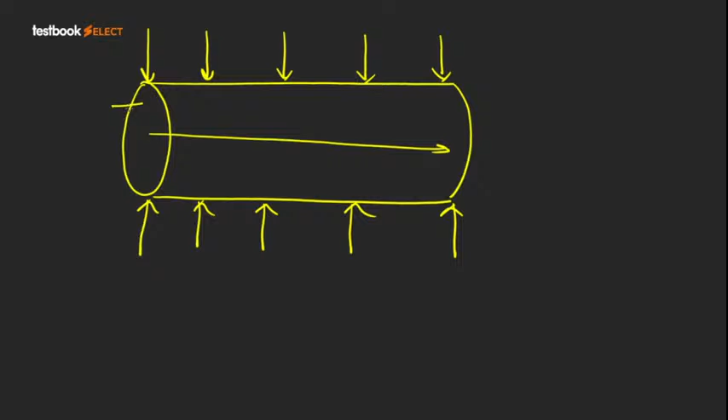Now guys, please note, when the tube is subjected to uniform heat flux, then the temperature of the surface is a function of x, and obviously the mean fluid temperature is also a function of x. So as the fluid moves ahead, its temperature will change from Ti to T0, and the surface temperature will also change from Tsi to Ts0. However, Tsi minus Ti is equal to Ts0 minus T0, and the coefficient of convection at the inlet side is the same as the coefficient of convection at the outlet side - whatever coefficient of convection is here, the same is there too.

This is what happens when you are talking of uniform heat flux. Now let us say the coefficient of convection is H, which is also given in the question. And they are asking you surface temperature at outlet. So you have to apply the same methodology that we applied in the second part of GATE 2013 question.

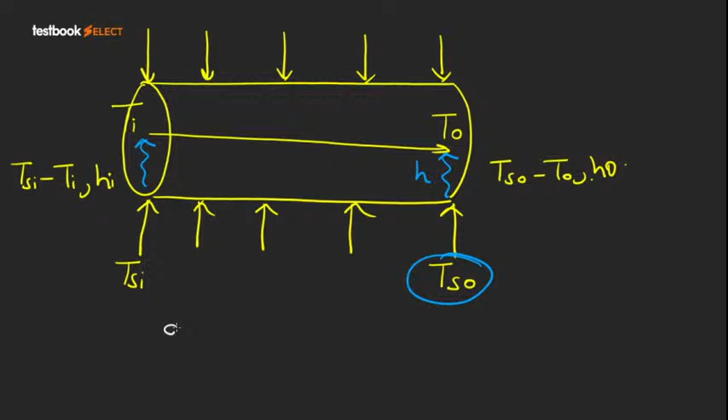The same methodology used in the 2013 question will apply here too. So what will you say? You'll directly say: I think at the outlet, the heat flux between the surface and the fluid will be H into Ts0 minus T0. So I think I can directly write Ts0 is equal to T0 plus Q dot by H. So if I know the value of T0, if I know the value of heat flux, if I know the value of H, I will be able to find out the surface temperature also.

Now firstly, let me check, do I know the value of T0? Yes. At the exit, what is the fluid temperature? At the exit, fluid temperature is 70 degrees Celsius. Do I know the value of H? Yes, 1697 watt per meter square Kelvin. So what about Q dot? Q dot we do not know. So we will have to find out a method to predict the Q dot value. We need some method so that we can predict the Q dot value. So let us check if I can predict the Q dot value or not.

So who will tell me how to find out the value of Q dot? How do we find out the Q dot value? Please think carefully and tell me, how to find out the Q dot value?

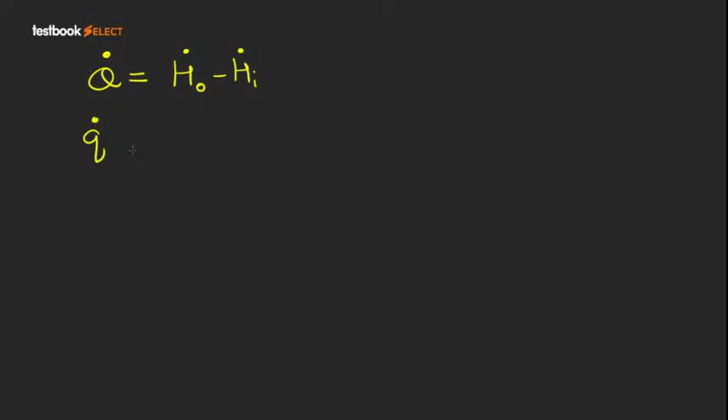But this is the case of uniform heat flux. So heat flux into the surface area of the pipe, that is pi d l. This will become mass flow rate into Cp into T0 minus Ti. So I think I can find out the heat flux: that will be m dot Cp (T0 minus Ti) upon pi d l.

So what will be your value of Q dot? Mass flow rate is 0.5 kg per second. Specific heat of water is what was mentioned. As stated, heat flux is uniform axially and circumferentially. By circumferentially they meant heat flux is same at all points around, and by axially they meant heat flux is also same along the length. So at all points, heat flux is the same. So how much is the value of Cp?

4.179 kilojoule per kg Kelvin, that is 4179. What is the outlet temperature? 70. What is the inlet temperature? 10. And how much is the diameter of the pipe? Let's consider diameter of pipe as 3 centimeter and length of pipe as 20 meter. Length of tube is 20 meter, yes. So 3 centimeter into 20 meter.

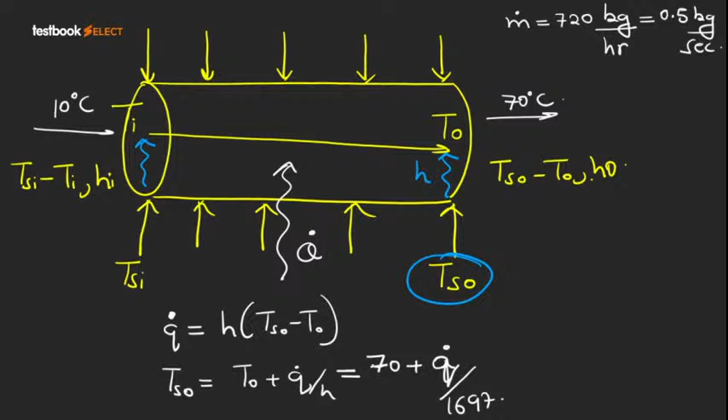This is 0.2, this was my mistake. Mass flow rate is 0.2. Please note, mass flow rate is 0.2.

So I think I will have 66510.8 divided by 0.5 into 0.2. So this value will become 26604.32. Now check the answer please. 26604.32 divided by 1697 plus 70, so answer is 85.6 degree Celsius. This is the correct answer.

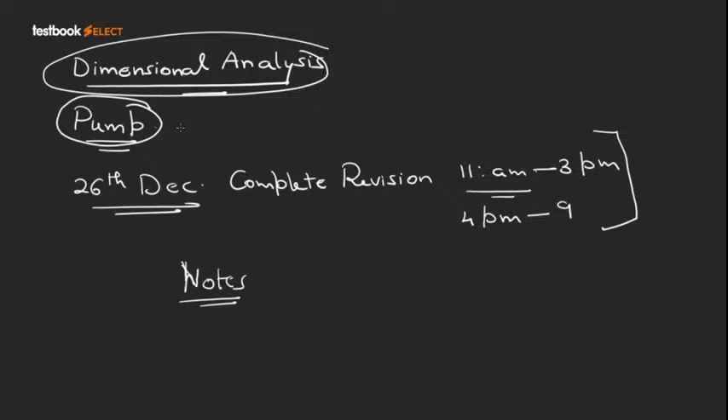So in these hours my major aim is to write notes of at least first 6 chapters, that is up to flow through pipes. Apart from flow through pipes, chapter like dimensional analysis we will do completely, then we will solve questions also. The chapter of pump we will do a theory session and the same day previous year question. Similarly turbines we will do a theory session and previous year question, and similarly for compressible flow.

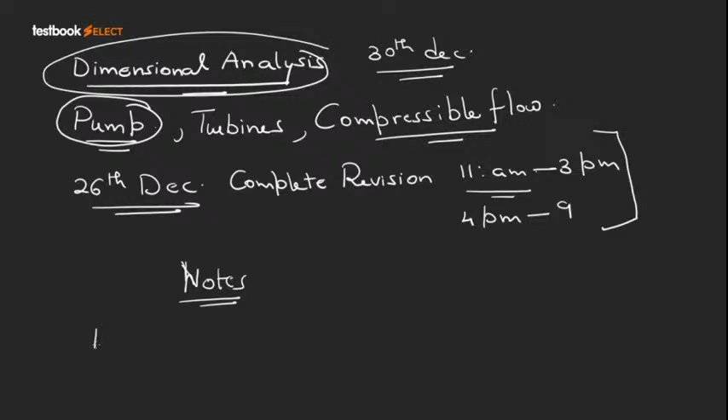So one of the questions we can solve directly now also. Actually I have the question, but I am thinking I will first explain its concept because that is related to temperature profile. So we will see that and then discuss it.

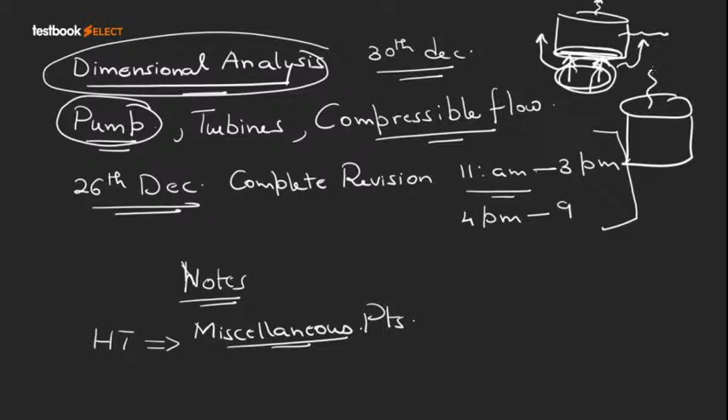सो एक्चुअली दिस सरफेस इज रिस्ट्रिक्टिंग द मोशन। फिर अल्टीमेटली हवा को यहाँ स्पेस मिलेगा और हवा यहां से जाएगी। सो टॉप सरफेस पे H मैक्सिमम, फिर पेरिफेरल सरफेस पे, और फिर बॉटम सरफेस पे जब सरफेस हॉटर है। and when the surface is colder the air will lose heat to the surface, this surface will oppose the downward motion of air, तो यहाँ पे H की वैल्यू मिनिमम, फिर यहाँ पे H की वैल्यू, और यहाँ पे H की वैल्यू मैक्सिमम।

ठीक है दीपांकर, डिपेंडिंग अपॉन वेदर द सरफेस इज हॉटर और कोल्डर, वन ऑफ द एंड सरफेसेस विल हैव मैक्सिमम हीट कन्वेक्शन कोफिशिएंट एंड वन विल हैव मिनिमम हीट कन्वेक्शन कोफिशिएंट। ठीक है, तो सही है।

नहीं सर, नेचुरल कन्वेक्शन में स्फेयर हो तो या फिर सिलेंडर। हाँ, सभी के केस में। बट एक्चुअली वो जो आप क्वेश्चन बोल रहे हो ना, वो वाला ऐसा क्वेश्चन नहीं था। वो क्वेश्चन पता क्या है?

वो क्वेश्चन बाउंड्री लेयर सेपरेशन पे बेस्ड है बेटा। वो बोल रहा है कि आपके पास एक स्फेयर है एंड द एयर इज मूविंग इन दिस मैनर, सो देयर आर सर्टेन पॉइंट्स विच विल हैव मैक्सिमम हीट कन्वेक्शन कोफिशिएंट। वो नेचुरल कन्वेक्शन पे बेस्ड नहीं है, वो फोर्स्ड कन्वेक्शन का क्वेश्चन है जो बाउंड्री लेयर सेपरेशन पे बेस्ड है। तो ये मैं सिखाऊंगा कॉन्सेप्ट, क्योंकि इसमें कुछ एक्सपेरिमेंटल फंडा भी है।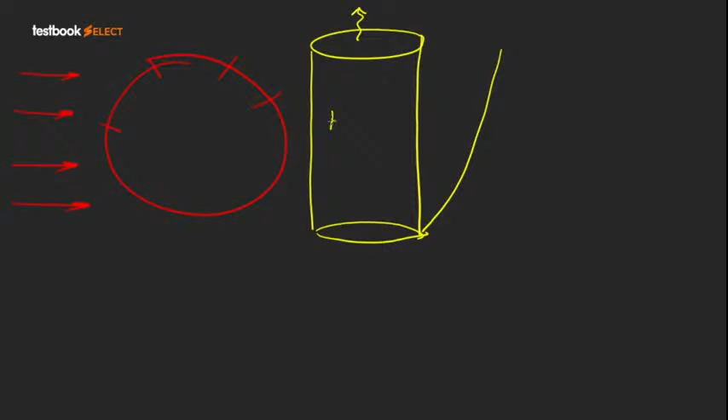हाँ हाँ, तो यस सर, आई एज्यूम इट्स हॉट। नहीं, अगर ये देखो ऐसे होगा, इस तरह से बनेगा। फर्स्ट ऑफ ऑल, इफ द सरफेस इज हॉट, on this surface you will have coefficient of convection, on this surface you will have coefficient of convection, on this surface also you will have coefficient of convection, and surface is hot.

Now check, if I talk only of the peripheral surface, so this is the boundary layer formation. So only for peripheral surface the coefficient of convection is maximum at leading edge. So if you talk only of peripheral surface, here the coefficient of convection is maximum and here the coefficient of convection is minimum. But now we are not talking of single surface, we are comparing multiple surfaces.

Now when you talk of convection from flat plate, I think it's very easy. What will happen? This layer of air will get hot, it will rise up, space will be occupied by remaining cold air, and friction forces are minimum.

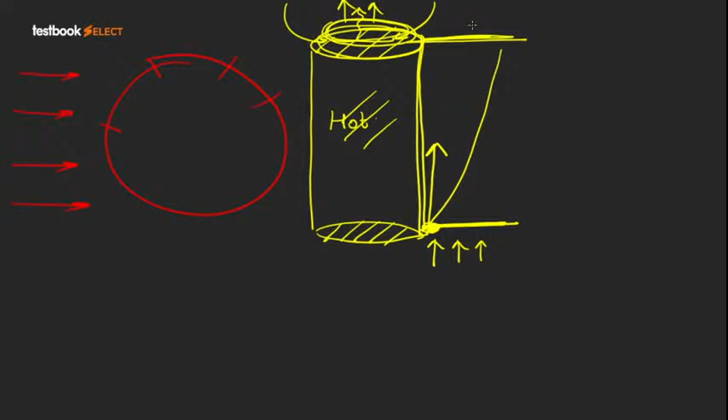But when you talk of vertical surface, as the fluid will rise up, this air will tend to occupy the space and this air will observe a friction force from the surface. हाँ ठीक है, सो मेरे ख्याल से क्लियर है, बट मैं कंप्लीट कर ही देता हूं। सो ग्रेटर इज द लेंथ, मोर विल बी द फ्रिक्शन फोर्सेस एंड लेसर विल बी द एवरेज कोफिशिएंट ऑफ कन्वेक्शन।

एंड व्हेन वी टॉक ऑफ दिस सरफेस, heat air will get heated up, it will try to rise up but it will be blocked, so it will go in this manner। So सबसे इजी मोशन कहाँ हो रहा है? सबसे इजी मोशन टॉप में हो रहा है, तो कोफिशिएंट ऑफ कन्वेक्शन मैक्सिमम आएगा, फिर पेरिफेरल सरफेस पे आएगा।

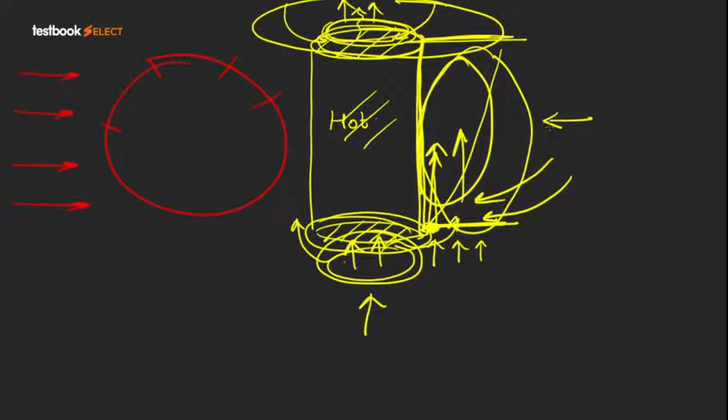फिर इस पे आएगा। जब हम इन दो को कंपेयर करते हैं तो इसमें लेंथ का बहुत बड़ा रोल होता है, क्योंकि अगर लेंथ बहुत लार्ज हो जाए तो कोफिशिएंट ऑफ कन्वेक्शन बहुत कम हो जाता है, जैसा कि हमने इस क्वेश्चन में भी ऑब्जर्व किया था।

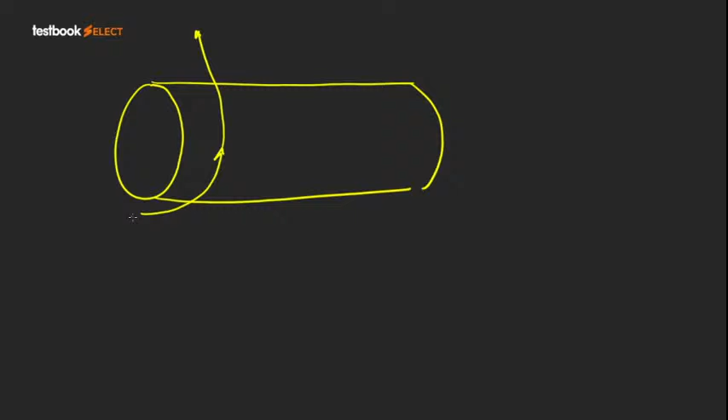हाँ, तो अब अगर उसको हम हॉरिजॉन्टल रख देते हैं, इफ यू कंसिडर दिस एज हॉरिजॉन्टल, सो व्हाट विल हैपन? द एयर विल टेंड टू मूव इन दिस मैनर, ऐसे ही होगा ना। बट यहां पे एक फिनोमिना भी आएगा, दैट फिनोमिना इज बाउंड्री लेयर सेपरेशन। तो आपको यही देखना है कि इन पॉइंट्स को कंपेयर करें तो क्या आएगा। सो ये थोड़ा सा डिफरेंट सिनेरियो है, तो इसी चीज की हम बात करने वाले हैं, वो बाउंड्री लेयर सेपरेशन की बात करने वाले हैं।

तो आपको पता है ना, अगर फ्लो वेलोसिटी बहुत हाई हो, पर उसके लिए फ्लो वेलोसिटी बहुत हाई भी होनी चाहिए, जो कि नेचुरल कन्वेक्शन में अचीव नहीं हो पाती है, तो हाई भी होना चाहिए।

हाँ, बट फ्लो वेलोसिटी पे भी डिपेंड करेगा ना दीपांकर। अगर फ्लो वेलोसिटी हाई है तभी आपको बाउंड्री लेयर सेपरेशन मिलेगा और वेक रीजन मिलेगा। मगर अगर आपकी वेलोसिटीज कंपैरेटिवली लो हैं एज कंपेयर टू ज्योमेट्री, तो पार्टिकल्स को इतना डिस्टेंस नहीं मिल रहा कि वो हाई वेलोसिटी अचीव कर पाए और फ्लो लेमिनार मिलेगा।

उस केस में ये लीडिंग एज है, ये ट्रेलिंग एज है, तो लीडिंग एज पे मैक्सिमम होता है और ट्रेलिंग एज पे मिनिमम होता है। तो वो डिपेंड कर रहा है कि आपकी डायमेंशंस कैसी हैं। अगर डायमेंशंस लार्ज हैं तो पार्टिकल्स को मूव करते टाइम एक सफिशिएंट स्पेस भी मिलेगा एक्सेलरेट करने के लिए, तो काफी सारी चीजें कंबाइन की जाएंगी।

ठीक है। तो हम मेजरली फोर्स्ड कन्वेक्शन के केस में देखेंगे, पर हल्का सा आइडिया नेचुरल कन्वेक्शन का भी दूंगा। अभी इसलिए नहीं बता रहा क्योंकि इसके लिए मैं पहले एक एक्सपेरिमेंटल - कैम्ब्रिज यूनिवर्सिटी का एक पर्टिकुलर रिसर्च पेपर है, वो पढ़ के आऊंगा और फिर बताऊंगा।